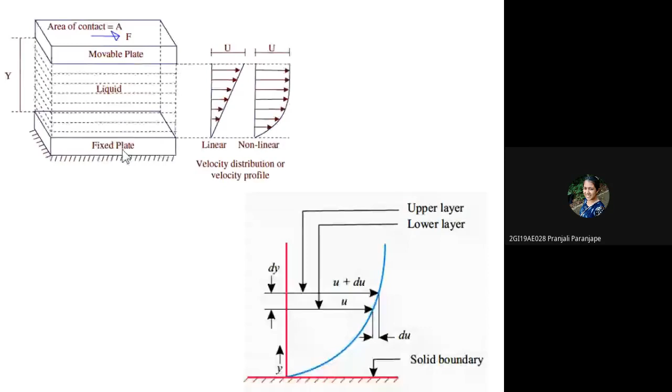Excuse me, sir, the voice is breaking a lot, so we are not getting the point. Okay, up to what point have you understood? Nothing, sir, from the start it's breaking a lot. Then you would have stopped me earlier. Sir, I thought it was my network issue. Then later it read that it's about everyone.

Okay, now the voice is clear. Yes, sir, yes, sir. Give the reply in the chat box. Shall I continue with the same thing now? Voice is clear now, okay. If any problem is there, just unmute in between and give the reply. Don't wait too long, just reply by unmuting the mic.

Today we are discussing viscosity. For viscosity, we have taken Newton's law of viscosity as an experiment, what Newton conducted. In that, he has taken a movable plate above the liquid volume considered for the experiment, and a fixed plate at the bottom.

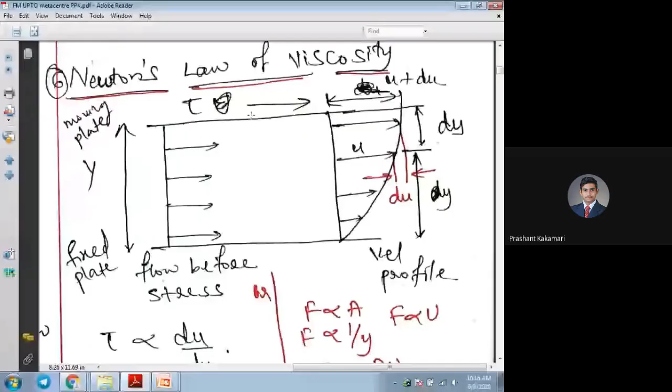We are taking this shear stress because of the top movable part. So this shear stress is related to contact area, and that can be written as proportional to velocity, and inversely proportional to distance y. As I told you, as you increase this y, the force required to move the plate will be less. As I decrease this distance y, resistance will be more. So shear stress or the force will be inversely proportional to the distance y, so that I have written du or u by y.

For a small layer of liquid, it will be du by dy. So whatever it is, the proportionality required means at what force I have to apply the shear stress, that will be decided by this mu, the coefficient of viscosity. So this coefficient of viscosity is nothing but the viscosity or the resistance required to overcome the liquid flow.

There, the force is directly proportional to area. Now here, area is what? Area of the surface which is in contact with liquid surface and the movable plate, so that area we are considering. And force is also proportional to velocity - after applying the force, if you see the velocity, that velocity is proportional to force. Meaning if you apply more force, velocity will be more, and if less force, velocity will be less - directly proportional.

But if you see the distance between the two plates, if I increase it, force required will be less. If I decrease the distance, force required will be more. So force is inversely proportional to distance y, as like shear stress. Now combining these force equations, I can write it as force is proportional to area in contact with liquid and movable plate, and u by y - meaning force is proportional to area and velocity, and inversely proportional to distance y, or distance between the plates.

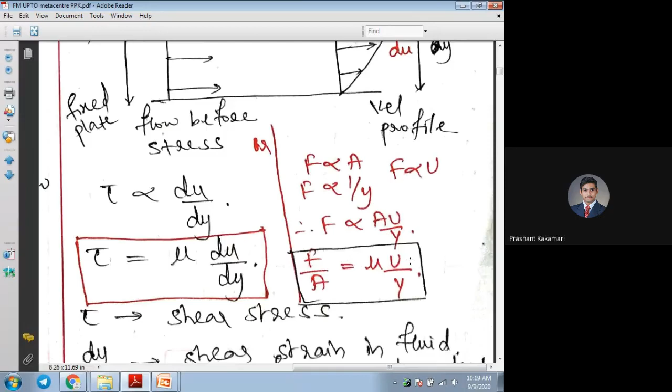Now if I take force by area, that is nothing but the pressure or stress, which is equal to mu. So mu is what again? It is just to make it constant or equal to sign - that is constant of proportionality. Mu we have taken, that will become u by y. So either you can find the viscosity by this relation or by this relation, depends on the given data in the problem. Data may be given to ask viscosity using shear stress, you can go by this. Or if the shear stress is not at all given, you can relate these two equations: mu into u by y, F by A equal to tau. So that tau will be nothing but shear stress. So either by using these two formulas, one can solve different numericals.

So this tau is nothing but the shear stress, denoted by tau. Then du by dy is nothing but the shear strain, we are calling it in the fluid, or it is also called velocity gradient. So velocity gradient is what? This change in velocity with respect to distance, or per unit distance - that we are calling velocity gradient.

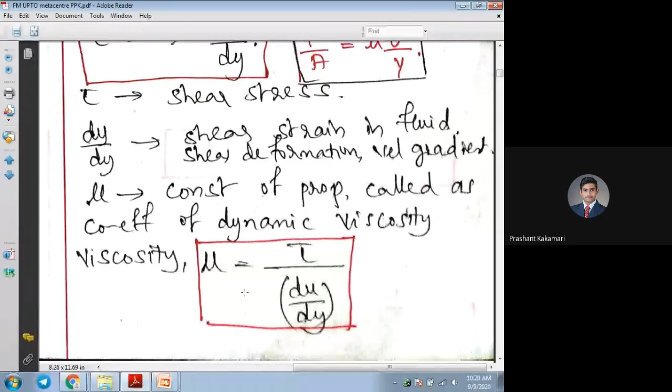Then mu is the constant of proportionality, also called coefficient of viscosity, or generally called dynamic viscosity many times. In problems, if they ask only for viscosity, you have to find the dynamic viscosity. So finally, if I write the equation for viscosity or dynamic viscosity, that will be mu equal to tau.

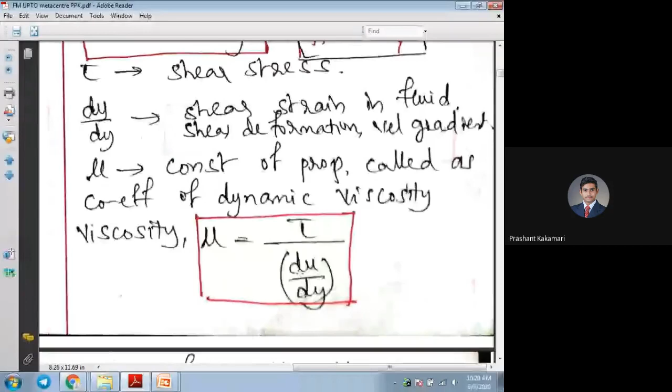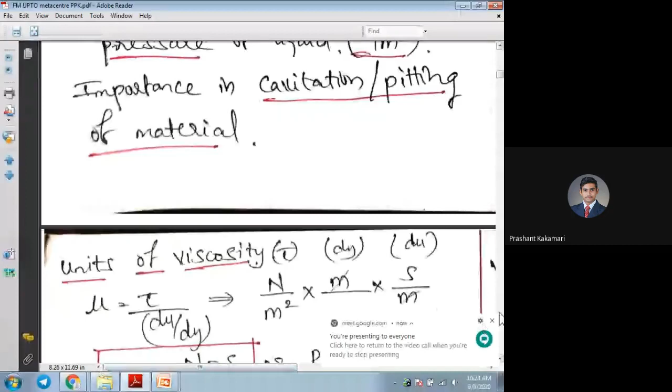So this viscosity is measured in various forms, and viscosity, if you see, is inversely proportional to temperature for the liquids. As you increase the temperature, the bonding between the molecules will reduce, or the volume of the liquid increases. So what will happen is the resistance or the viscosity value will decrease for the liquid, and it can easily flow. For this, one example you can take is coconut oil.

So as you see, at lower temperature it may be in semi-solid form. At given proper conditions, it may be in liquid form. And once I start increasing the temperature, the fluidity of the oil will increase.

But for the gases, if you consider, the viscosity is completely opposite, because the gases are moving not with the bonding between the molecules. It is the movement between the molecules, or the molecules are changing their paths and continuously excited in the gaseous form. Once you start increasing temperature or pressure for the gases, the molecular activity still increases, so viscosity increases, because all the molecules will come together at high pressures and less volume, and it will start to increase the viscosity at very high temperatures.

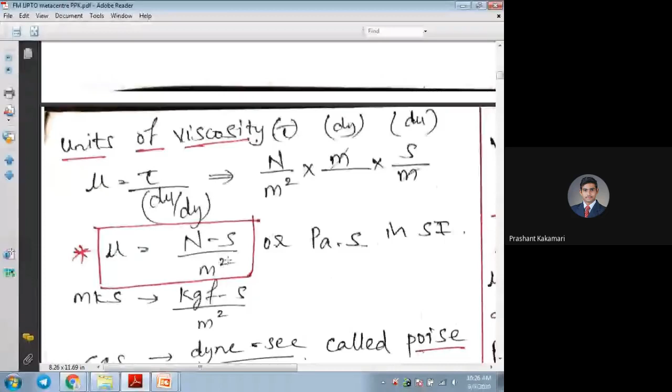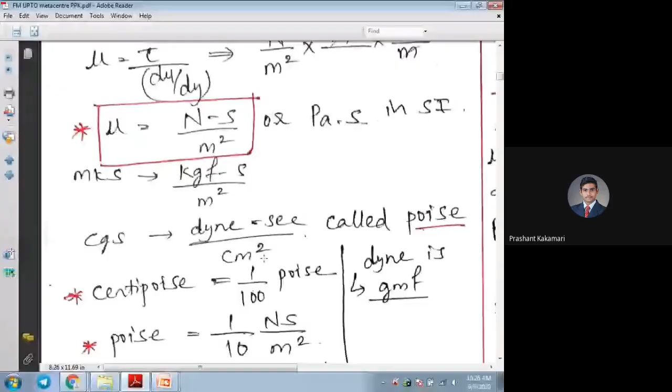So the unit of viscosity in SI unit is Newton second per meter square, or you can call Pascal second. Also in SI MKS unit, you can write it as kgf second per meter square, or in CGS units, dyne second per centimeter square. This is called poise. So one poise is nothing but 0.1 Newton second per meter square in SI unit.

If you write it in centipoise, it is nothing but 1 by 100 poise. So 1 by 100 into 0.1, if you multiply, that will become again Newton second per meter square. So this will be discussed in the problems again.

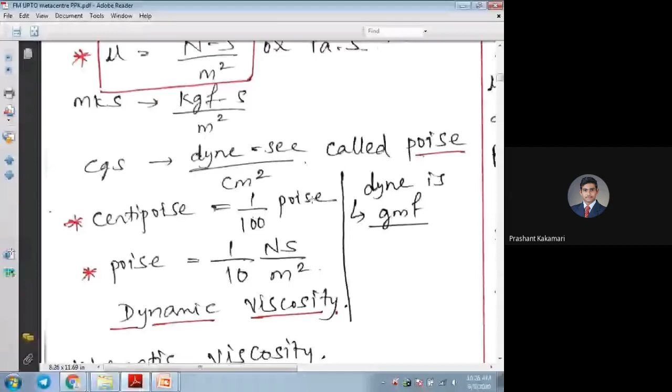Next point is kinematic viscosity. So kinematic viscosity is just a ratio of dynamic viscosity with respect to mass density rho. So mu by rho is what? Dynamic viscosity divided by density value.

Now if you check the kinematic viscosity units, it's denoted by nu here. If you check units, the dynamic viscosity has meter cube above, so we can cancel this meter square and meter square at the upper side. So we are left with Newton second meter per kg.

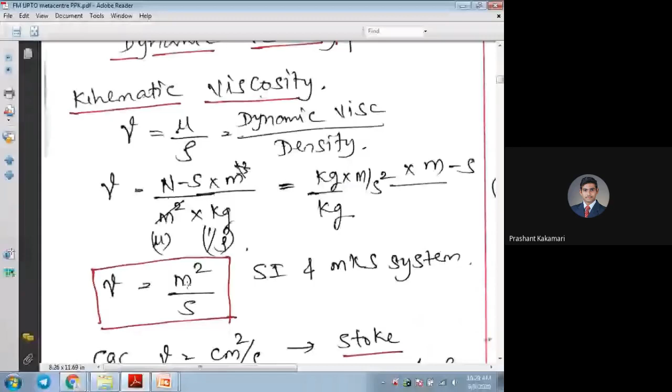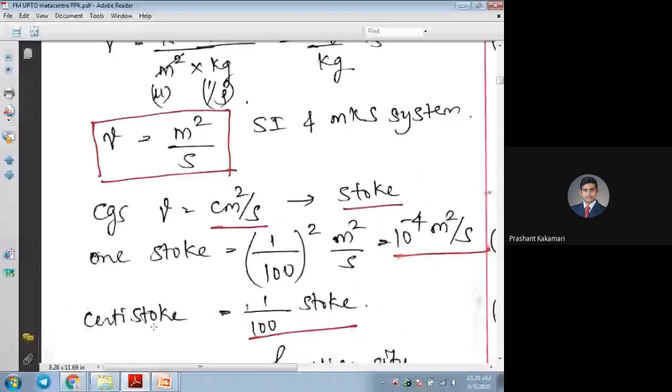It can be written in Stokes in CGS system, or it can be written in centi-Stokes also, 1/100 Stokes. And here, 1 Stoke is nothing but 1/100 square meter per second.

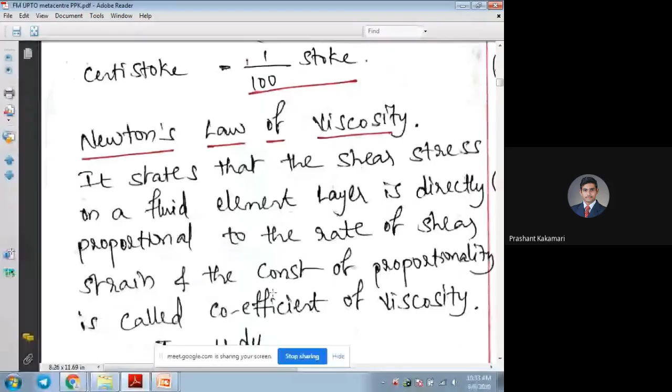So now, by understanding this equation of viscosity, the experiment Newton conducted and found out the equation, we know that tau equals mu into du by dy. So if you try to define it, it states that the shear stress in a fluid element or fluid layer is directly proportional to the rate of shear strain. The rate of shear strain is the velocity gradient, so you can write proportional to the velocity gradient also. Shear stress is proportional to the shear strain or velocity gradient, and the constant of proportionality is called the coefficient of viscosity.

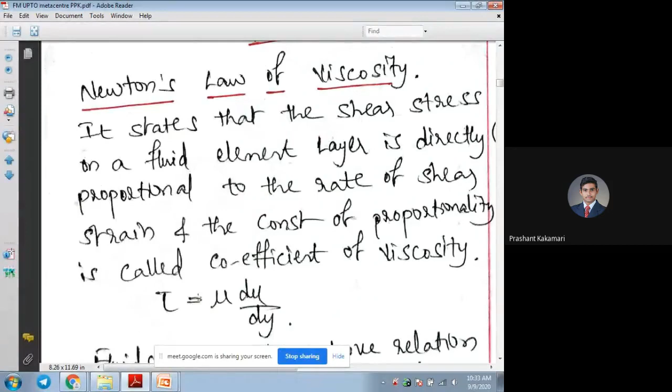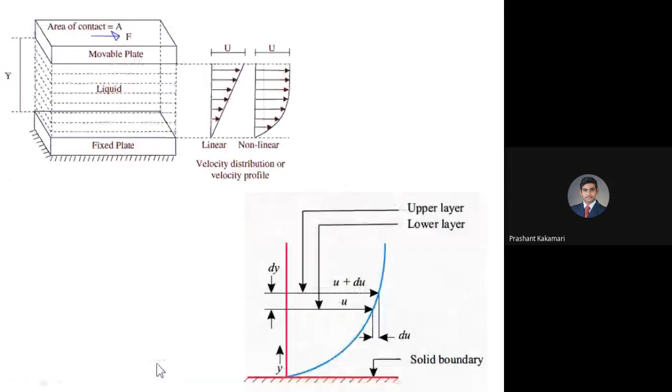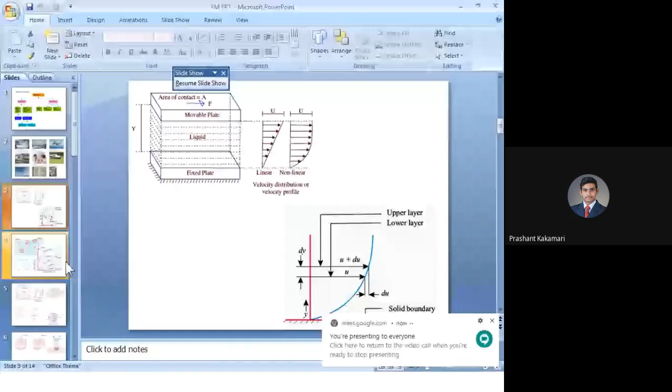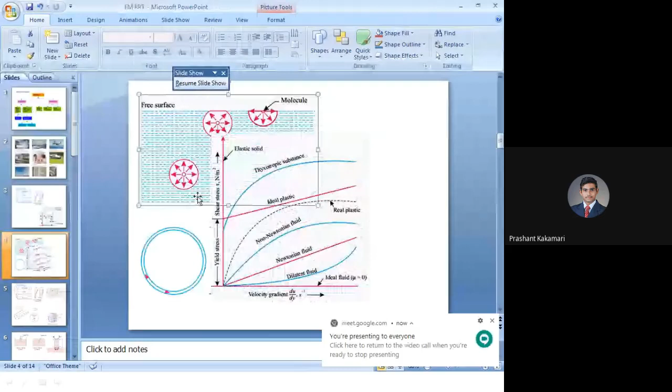Okay, yes, dynamic viscosity I'll once again explain to you. Just a minute, delete this. So if you see this graph upon the viscosity, on the y-axis they have taken shear stress or the stress values in Newton per meter square, the tau value they have shown. On the x-axis they have taken the shear strain, which is nothing but du by dy.

And if you see the different liquids, first I'll go for the Newtonian fluid because we have discussed dynamic viscosity just now, and we know how the Newtonian fluid should obey the law. If you see the Newtonian fluid, it is proportionally increasing as the velocity gradient increases, or as the shear stress or force increases. The property of the fluid behaves as per this line. So as the velocity gradient increases, the shear stress requirement also increases.

And we have different types of fluids here. Elastic solid is there - it is not at all changing with the velocity gradient, whatever stress you apply, until some limit. The plastic or semi-plastic materials, up to some stress, will not change their dimensions or move with respect to the forces. But after yield stress, it will start bending or changing its fluidity.

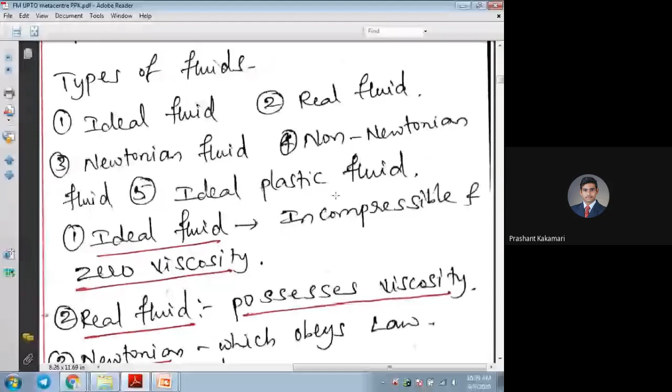So again, we'll come back to this and we'll observe. So we have ideal fluids, real fluids. Real fluids are nothing but the non-Newtonian fluids almost. Then we have Newtonian fluids, non-Newtonian fluids, ideal plastic fluids, thixotropic fluids, etc., or ideal fluids.

Coming to the ideal fluid, which has zero viscosity, these are incompressible in nature. Maximum times these are incompressible. We cannot change its dimensions by compressing or decreasing or increasing volumes. We cannot change the compressibility.

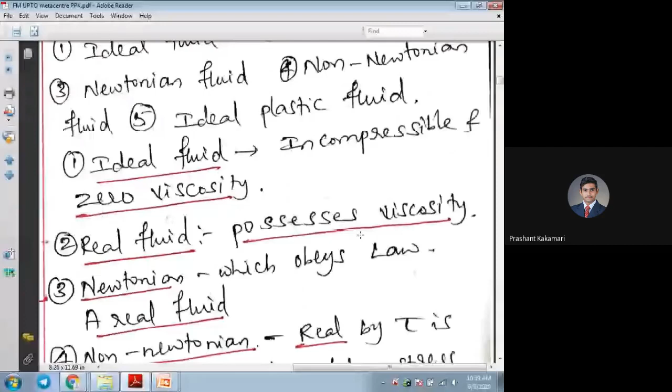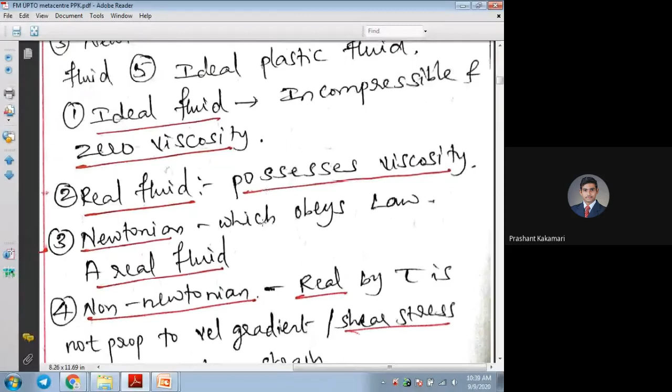Real fluids possess viscosity which is a little bit higher than Newtonian fluids. That is one thing, which is in curvilinear proportionality with respect to velocity gradient and shear stress. And Newtonian fluid, if you see, it just obeys the law of Newton. Whatever Newton explains the law for a given fluid, we call it a Newtonian fluid.

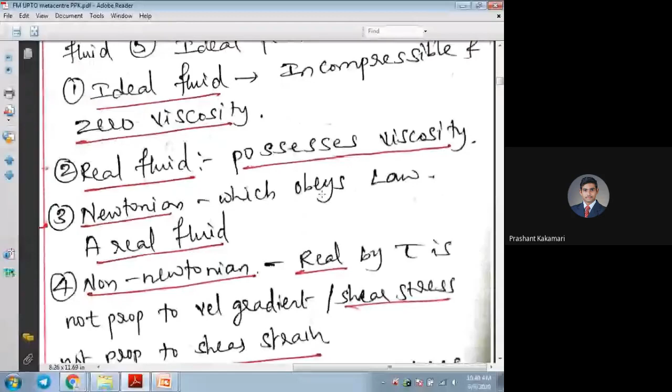Then non-Newtonian fluids, if you see, this is the real fluid, as I told. So real fluids and non-Newtonian fluids are almost the same. Here shear stress is not proportional to velocity gradient, it has a curvilinear path. So such liquids we call non-Newtonian fluids.

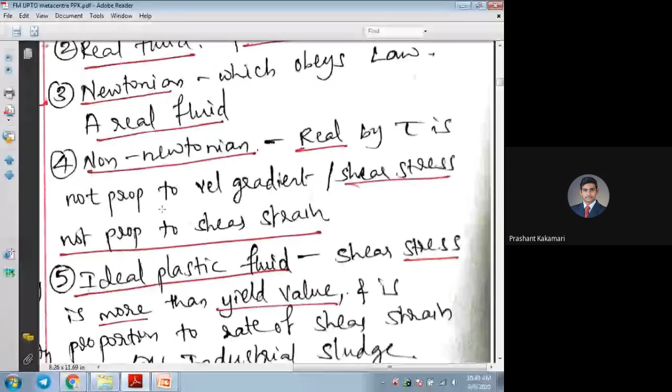Now comes the ideal plastic fluid. As I told you, to deform or start the flow in a given material, if it requires some minimum force to overcome the dimensions or to overcome the flow, that force we call yield force or yield stress. So once the yield stress is crossed, then it will start flowing. That is called an ideal plastic fluid.

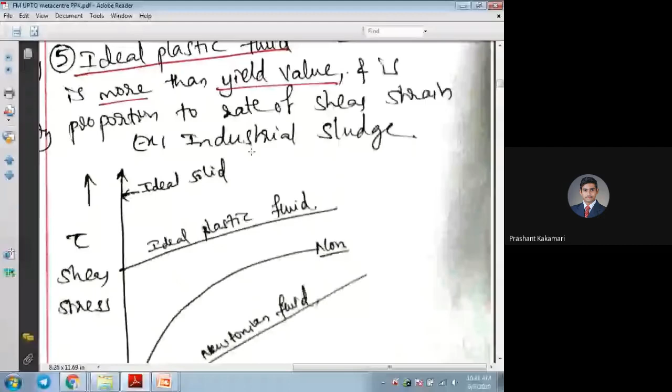So until that point, it has to overcome the resistance to change the velocities. Like very heavy viscosity fluids, or industrial sludge or waste, if you consider, you have to apply maximum pressure, and once it crosses some limit of the given stress, then only it will start flowing.

So this graph will indicate what types of liquids are possible. Change in dimensions with no flow is a solid, but even ideal solids also have some yield stress. So at a given point it may break, or it may start acting like a plastic body. So that also depends.

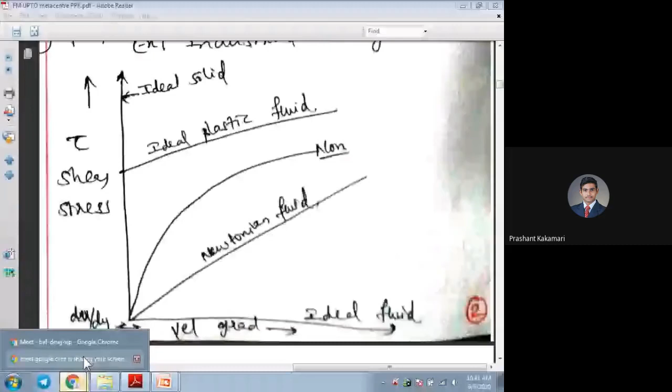So I hope the graph is clear to everyone. The shear stress, if it is proportional, it is a Newtonian fluid, otherwise it will be a different fluid.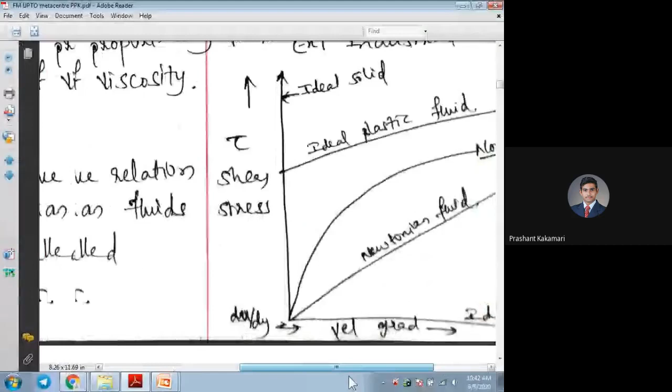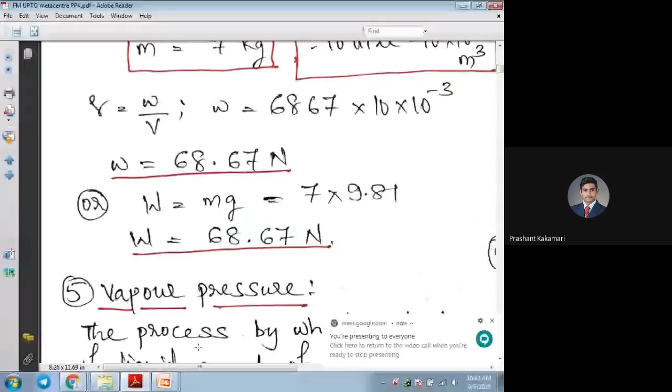Now we'll go back to dynamic viscosity once again. So shall I explain this once again? The change in distance, velocity gradient and shear stress, how it's going to behave with Newton's law? Is it required, okay?

So as per Newton, he has taken two plates. One is the fixed plate at the bottom, one is the moving plate at the top. The 3D sketch I showed earlier, you can imagine that.

Now any fluid, if you consider, generally it has some resistance to flow, because to start the flow between the liquids, we need to apply some force, and the force applied here at the top, if you see, is tangential in direction, so we call it shear stress. So force applied per unit...

The velocity gradient, or the change in velocity, is also proportional to force. As you apply high force, there will be a high flow rate or high movement of the liquids, and if you apply less force, it will be less. The velocity obtained for a layer of the liquid...

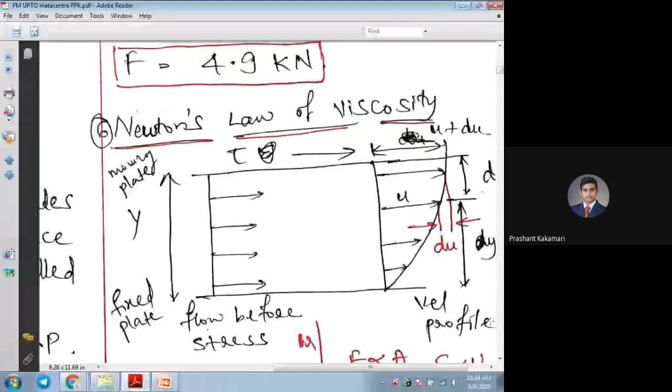Try to write it in the form of an equation. I can write it as one side, on the red color we can see written, that force is directly proportional to area. So how much area is in contact with the liquid, that much force we have to apply. One thing. One more thing is velocity.

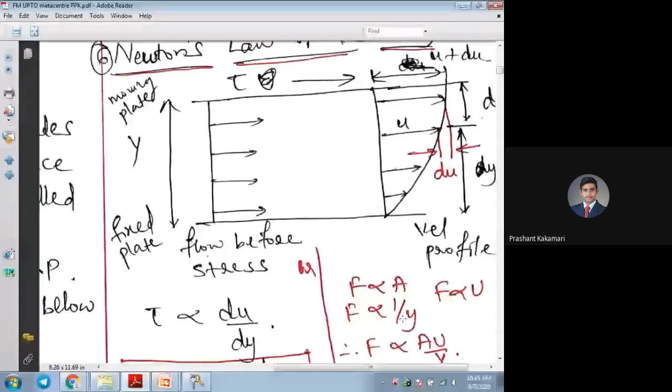And also distance, if you see, as the distance reduces, the force also increases because of the fixed plate or the non-moving layers at the bottom. So F is inversely proportional to Y. And if I combine all these proportionalities, I can write it as F equal to mu into A U by Y, or F by A equal to mu into U by Y. For the entire thing, the shear stress in the tangential direction, what is applied by the force per unit area, is also proportional to the velocity gradient.

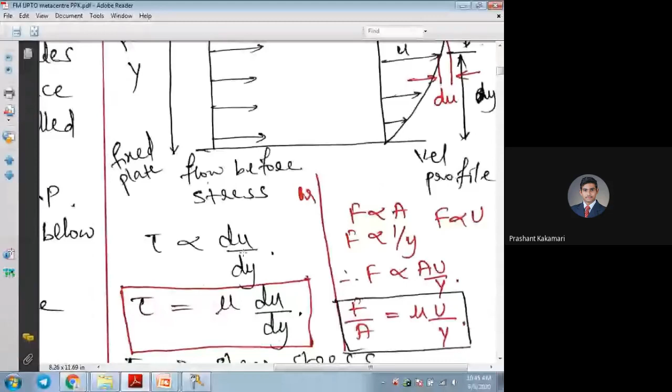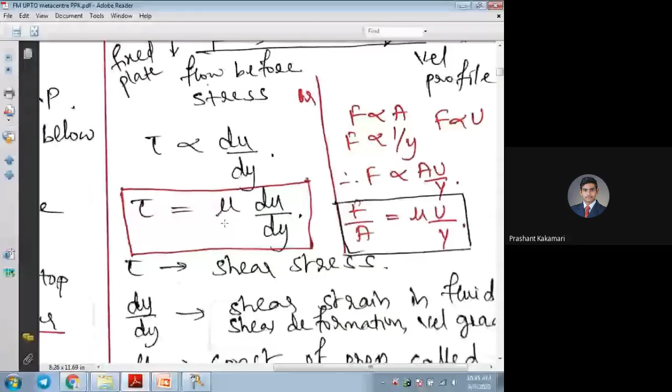To overcome this proportionality constant, we apply dynamic viscosity, or the coefficient of viscosity. By this equation, one can find out the viscosity value. As per this law, assume viscosity is not known to us. To find that viscosity, I can write mu equal to tau into dy by du, or mu equal to tau by du by dy. I hope this point is clear to everyone, how we are finding this dynamic viscosity or the coefficient of viscosity.

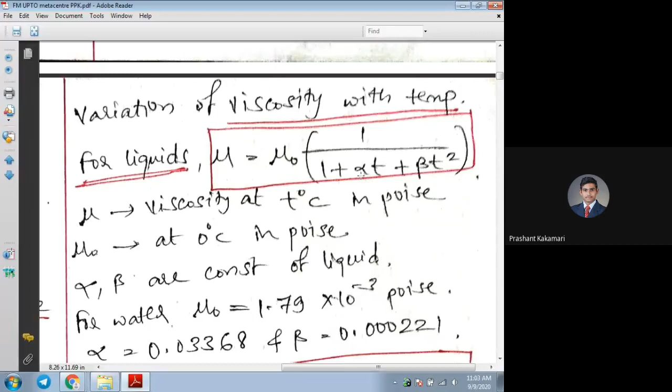Viscosity, if you see, is inversely proportional to temperature here. As per the generalized equation, mu naught into bracket 1 divided by 1 plus alpha t plus beta into t square. If you observe this equation and check the proportionality, temperature is inversely proportional, meaning as you increase the temperature, the viscosity value is going to reduce for the given fluid. Or if the viscosity value is very high, what will happen? The temperature value may be less. So that's how it is dependent on temperature, and for that I have taken this equation.

So this equation and the liquid viscosity-temperature relation, if you see, in liquid it is inversely proportional. That's why as temperature increases, molecular bonding reduces and viscosity of the liquid also reduces as you increase the temperature. But for gases, as you increase temperature, molecular activity in the gases increases and viscosity also increases. So the force required to move the gases or the layers of gases at very high temperatures is very high.

You can take examples in villages: if you see the gases coming from a small burner, they come out with very high velocity without any disturbance or problems. But if you see the same gases coming from a chimney, or a very high tower, or a very long pipe from thermal power plants or other big plants, those gases will look like they are moving very slowly. That is possible only because of very high temperatures. In the plant, if the temperatures are very high, the burning temperatures are very high. In such cases, if you exhaust those gases at very high levels of the atmosphere, what happens is the velocity of those gases will be less. That is due to the high viscosity of gases.

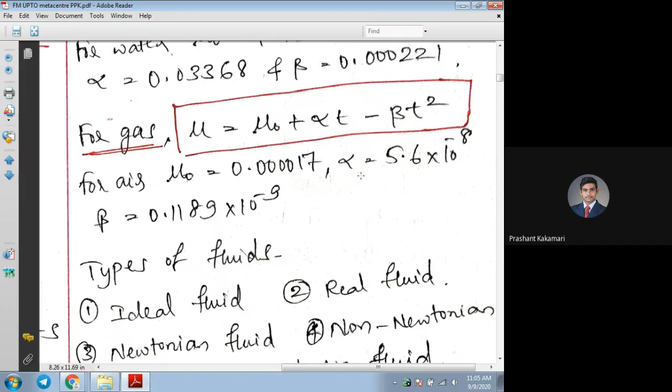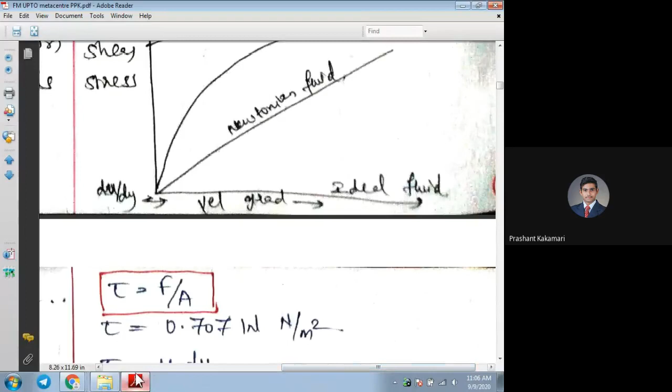So take down this problem. First problem with respect to viscosity.

The question asked is: viscosity of water is 0.01 poise. Find its kinematic viscosity and dynamic viscosity in SI units, if the specific gravity is 0.998. Specific gravity doesn't have any units. For specific gravity, they give a reference fluid like water, and one should find out the density of the other liquid or weight of the other liquid by the specific gravity relation.

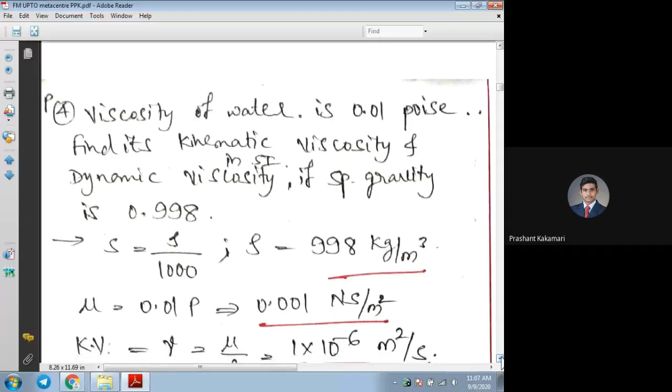So in this problem, you have to focus on the viscosity values. One is dynamic viscosity that we found out by derivation from Newton's law. Another equation is kinematic viscosity, found from the ratio of dynamic viscosity to the density or mass density.

Now, first, one can directly find the viscosity because dynamic viscosity of water is directly given as 0.01 poise. As I told you, if you multiply 0.01 by 0.1, it becomes the Newton second per meter square value. So 0.01 poise I can write as 0.001 Newton second per meter square.

So in this problem, there's no need to rewrite the shear stress or force relation with respect to viscosity or the relation with the velocity gradient. The viscosity of water is directly given here, so we write it in SI units as 0.001 Newton second per meter square.

Then I need to find kinematic viscosity, because as per the question, kinematic viscosity also needs to be found. So I'll write nu equal to the ratio of dynamic viscosity to density.

Which density do we have to take now? That is the question. If you take mass density, the unit will be meter square per second. If you take weight density, the units will be different. For meter square per second, as per the SI unit, I'll consider the mass density.

Now, to find mass density, we use the relation between specific gravity and mass density, because viscosity and density themselves have no direct relation, but we know the relation between specific gravity (or relative density) and density values. So I can write S equal to density of the given fluid to the standard fluid.

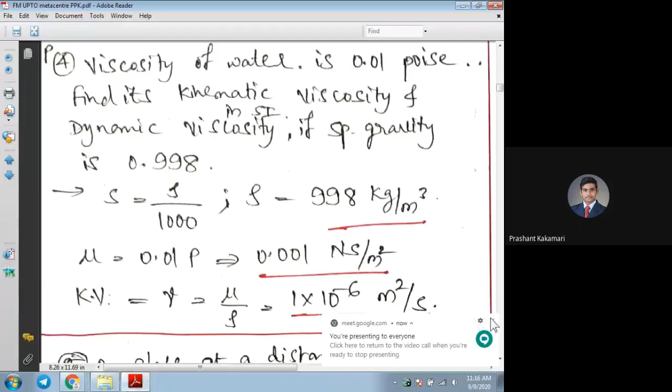Yes, so in the next problem I'll read the question here first, you'll understand what is given, what is asked. Now comes to Newton's law. A plate at a distance 0.0254 mm from a fixed plate moves at 0.61 meters per second and requires a force of 1.962 Newton per meter square. Area of the plate. Determine the viscosity or the dynamic viscosity between the plates.

So this is nothing but the experiment of Newton itself. What they are doing is they have taken two plates, one fixed plate at the bottom and a moving plate at the top, which is at a distance of 0.0254 mm. The top moving plate is moving at a velocity of 0.61 meter per second. To overcome the resistance of liquid, or the viscosity of that liquid, we have to apply a force of 1.962 Newton per meter square. This is nothing but the shear stress we have to apply, the tangential force applied on the liquid surface, per meter square area of the plate. Now you need to find out the dynamic viscosity of this liquid between the plates.

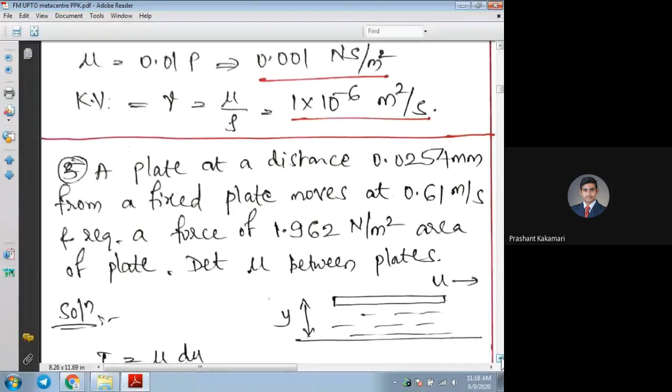So the sketch is made here. Y is 0.0254, U is 0.61. The equation can be written in either of two forms. First, shear stress is equal to viscosity into velocity gradient du by dy, or you can write tau equal to mu into u by y, assuming the complete liquid volume itself is a layer.

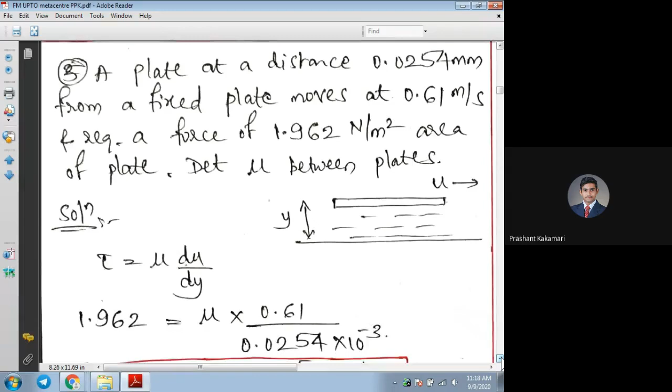So what we'll do is substitute the values in SI units. 1.962 is in Newton per meter square, so already in SI units. Mu we don't know, that is what we need to determine. The change in velocity u is 0.61 meter per second in SI unit. The distance given is 0.0254, this we need to convert into meters, because the shear stress is in Newton per meter square and velocity is in meter per second, but the distance is in mm. So I'll multiply by 10 raised to minus 3, it will be in meters.

Once you substitute all these values, one can get the mu value. So how much are you getting by this equation? Just check. Mu equal to 1.962 into 0.0254 into 10 raised to minus 3, whole divided by 0.61. So you'll get the dynamic viscosity or coefficient of viscosity. Newton has given this law to find the coefficient of viscosity.

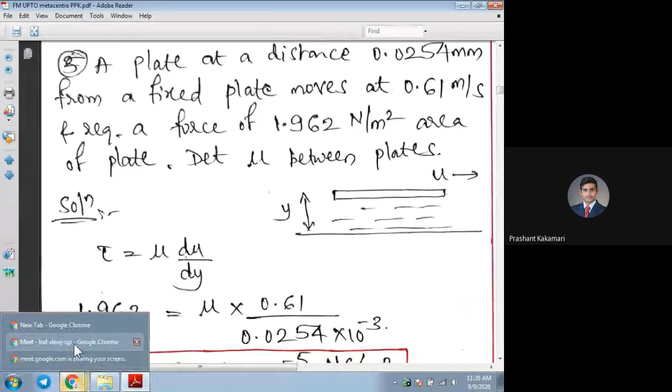Have you understood the problem? Just by one equation, applying Newton's law itself, because the statement itself is Newton's law of viscosity. Two moving plates, a fluid is kept in between, one is moving, one is fixed. Distance is given, area of the plate is given - sorry, area is not given here, they have given it in terms of shear stress. If they had given it in the form of force and area, then we would have taken F by A.

We'll take the next problem.

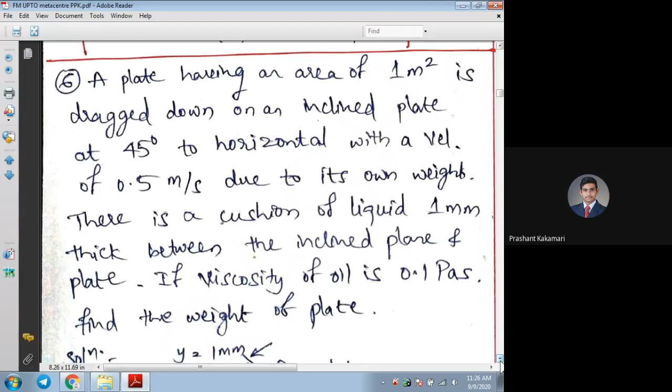So coming to the analysis, I can draw the sketch like this with the horizontal plane, 45-degree fixed plate, I will consider 45 degree. Plate is also moving at 45 degrees, and in between there is oil of thickness 1 mm. Velocity is 0.5 meter per second. Viscosity of the oil is also given as 0.1 Pascal second or 0.1 Newton second per meter square.

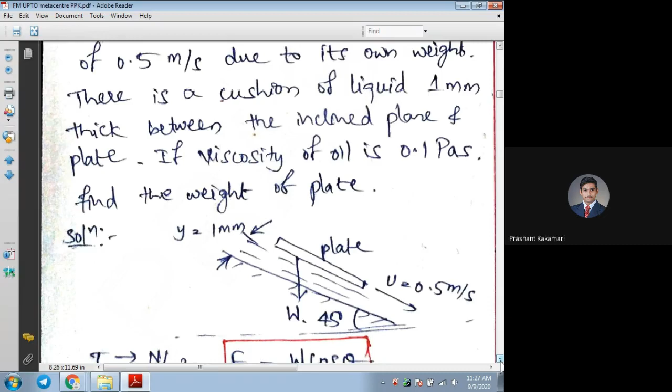Now, if you consider the weight of the plate, as they are asking, you find only the weight of the plate. Don't focus on all these other parameters given. So if I want to find out the force by the plate or the weight of the plate, consider that it is acting downside, so that is shown there.

So one can find out the force by using this relation because here we know the angle, and we know... weight is given or not? Weight of the plate is nowhere given. So what we can do here, cos 45 is known, but what about the W?

W is not known, still we need to find out. So keeping that W as unknown, what they are doing is finding cos 45 only, because of the adjacent and hypotenuse lines which are known, assuming that angle is given, so we don't need the length of the lines. So F will be 0.707 into W.

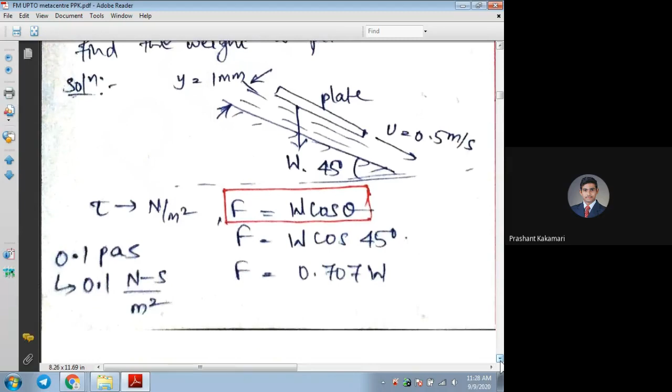And conversion of that Pascal is given at the side, that already we have discussed. And next step, to find the weight of this, as I told you, shear stress I can write it as F by A. So assume I'm writing F by A equal to mu into U by Y.

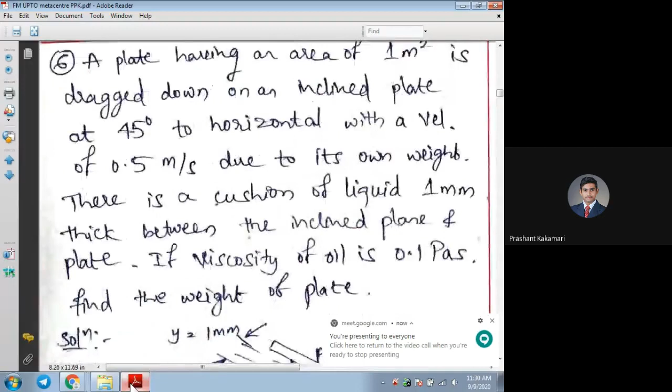What we have done, we have taken two plates. One is fixed, one is moving. Both plates are at an angle of 45 degrees. This is a special case, angle 45 degrees. And it's moving downside because weight always acts downside due to gravitational force.

In this problem, using this velocity, viscosity, distance between the plates, angle, or area of the plate, one should find out what is the weight of the plate. That's all. Now for that, 45 degrees given, it is with respect to adjacent and hypotenuse lines.

So once one can write the force as the force applied by the plate in the inclined direction, I can write W cos theta. The direction in the inclined side shown is nothing but the force applied by this weight of the plate.

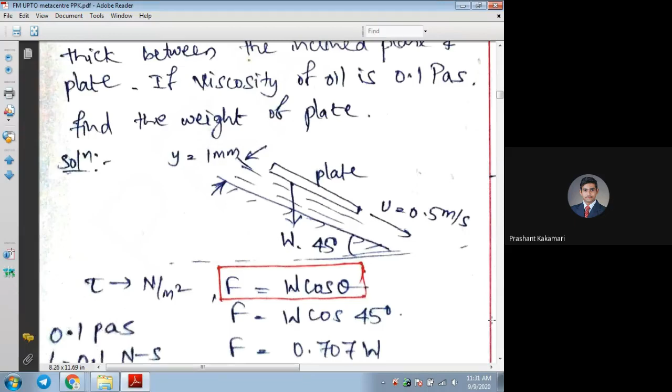So W is not known, but I can write cos 45 value. Once this is known, I will take the Newton's law of viscosity, that is F by A equal to mu into du by dy.

In this formula, if I substitute all these values where W is unknown, and by just transferring the terms from left to right side, I can find out the W, which is around 70.72 newtons in SI unit. So that weight of the plate is 70.72 newtons.

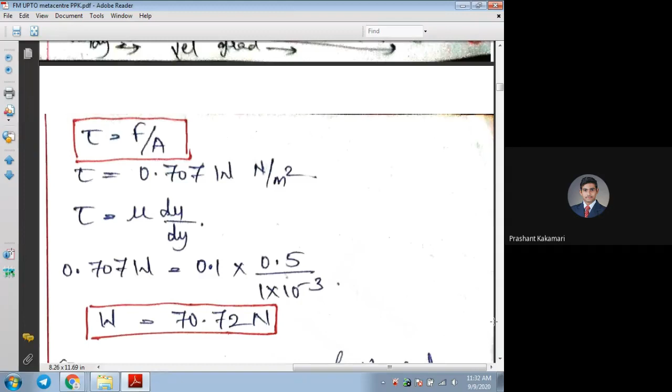So we'll see the next problem. In this problem...

Dynamic viscosity, same viscosity again, dynamic viscosity of oil. Please everyone also follow the problem, understand it, or if you want, you can write down and check the answers by the equations, how you are finding it, whether the answers are correct or not, or you just copy down so that you can understand the problem, how to solve.

So in this problem, they have given dynamic viscosity of oil used for lubrication purpose between a shaft and a sleeve is 6P. So 6P, if it is given as a viscosity, whether it is 6 Pascal or 6 poise or what, can you reply me?

What do I have to assume? Poise? Yes, very good. So if only P is given, or with respect to viscosity it is told, you have to assume it as 6 poise. The shaft diameter is 0.4 meters.

We are lucky that dimensions are given in meters directly, no need to convert. Diameter of the shaft is 0.4 meters and it rotates at 190 rpm. Until now we discussed speed in linear movement, meter per second. But in this problem, the shaft cannot move in a linear direction, it has to rotate between the sleeves of the hollow cylinder. A solid shaft is rotating inside the hollow cylinder with a lubricating oil, at 190 rpm.

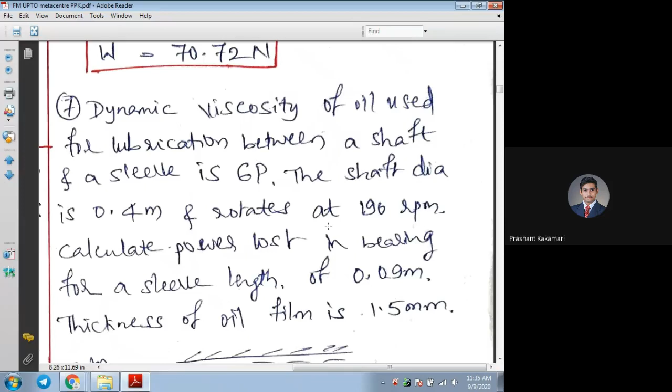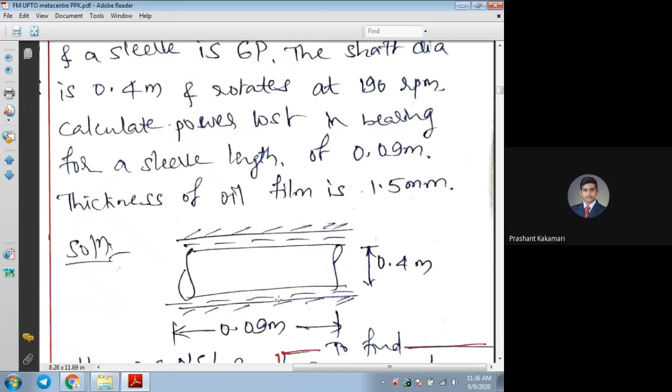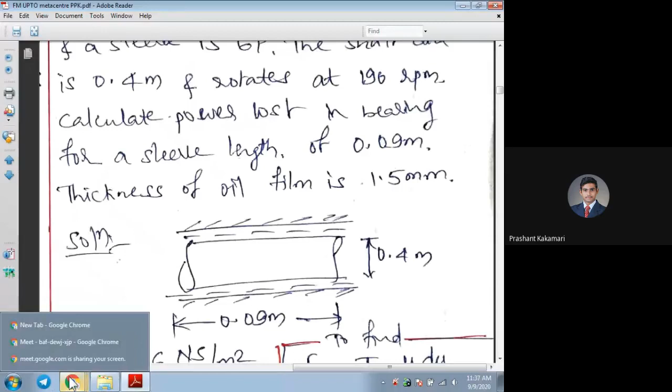So here RPM is given. When they ask for power loss, we need to use different formulas itself. So can anyone recall any relation which relates RPM and power loss? Just try, can you reply? The relation which relates speed in RPM and the power loss P.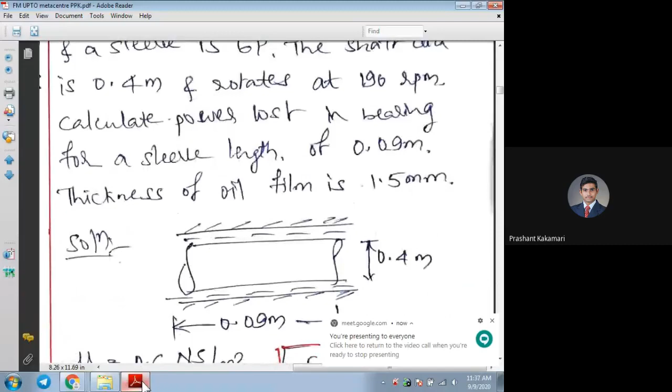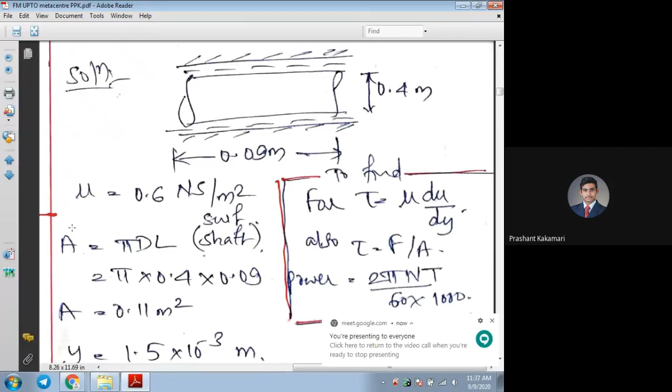Okay, what I can do here: as you know, 6 poise is given, I'll multiply by 0.1 to get it in Newton second per meter square. Then area of contact - length is given, and area, if you see, is the hollow cylinder area, the surface area of the inside cylinder, that is pi d L. Pi d is the perimeter of the cylinder; throughout the length, that becomes the contact area, the cylinder in contact with the oil for that given distance, pi d L. So area is clear for this hollow cylindrical area, or surface cylinder area, it is pi d L only. Pi d is the perimeter, ring is pi d, L is the cylinder, total cylinder surface. So it's inside, I'm taking diameter as the inside diameter, 0.4 meters, and L is 0.09 meters. So one can find the contact area of the oil and sleeve, that comes around 0.11 meters squared.

As I told you, the relation between power and speed - since they are asking power loss and speed is given, and we don't know torque - what you can write is 2 pi n T by 60. For all rotational shaft equations, wherever power transmission is possible, the power lost or power transmitted by the shaft, you can take this equation, 2 pi n T by 60. Here n is in rotations per minute, which we need to convert to seconds in SI unit, so we are dividing speed by 60.

And this is the torque. Torque is force applied for a given radius of the shaft. The torque available on the shaft is nothing but the force available in the tangential direction from the center of the shaft, F into R - I'll show it later. That is the torque. And why are we dividing by 1000 here? It is not to convert any values here, but we are dividing by 1000. Any answer?

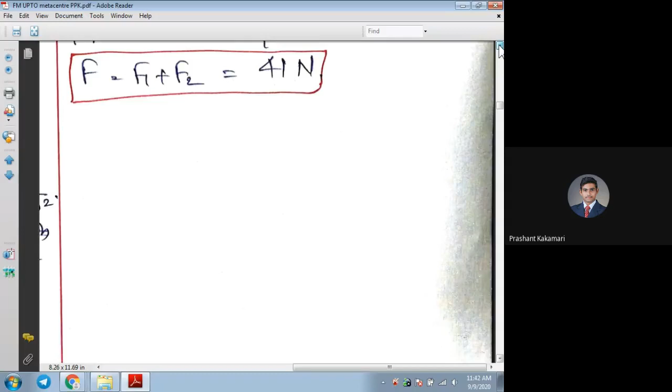So now I have got the U value. U value is around, how much did you get there? U value is 3.979, I'll take 3.979 meter per second. Now we got the velocity value.

Viscosity is also given. Y is also given in mm, we can convert it in meters. By this equation, tau is not known, so I can write directly tau by substituting all these values. Viscosity is 0.6 Newton second per meter square, found out here, at the top.

U is the velocity in linear, 3.979 meter per second. Distance y is 1.5 into 10 raised to minus 3 meters. Once you substitute all these values, I can find out the shear stress applied, or what is there in the liquid surface which is in contact with the shaft. Because the shaft is rotating, it is trying to overcome the resistance of that liquid, or trying to overcome the rings of that liquid cylinders, or the liquid rotating in cylindrical layers.

So there is a resistance between all the cylindrical layers between the shaft and the sleeve, and that resistance it is overcoming. So the answer is around 1.59 or 1.6 into 10 raised to 3 Newton per meter square. Can you tell me, what can I write in other form? I can convert Newton into kg, that is also there, but we are preferring Newtons in SI units. So I can also write 1.6 kilonewton per meter square. Correct? 10 raised to 3 is kilo. Yes.

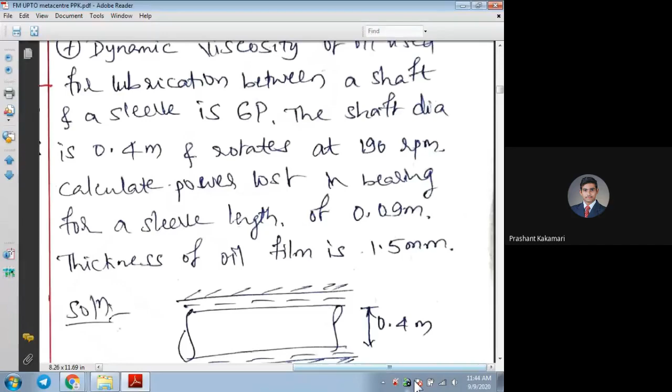Then what is the question? We have to find out the power lost in bearings of the sleeve length. Only if you find the power lost, it is over. But to find the power lost, we need all these equations. This is the power available in the shaft, not power lost. The earlier power we took is the power available from the shaft that we got. But here also torque is not known, only RPM is known.

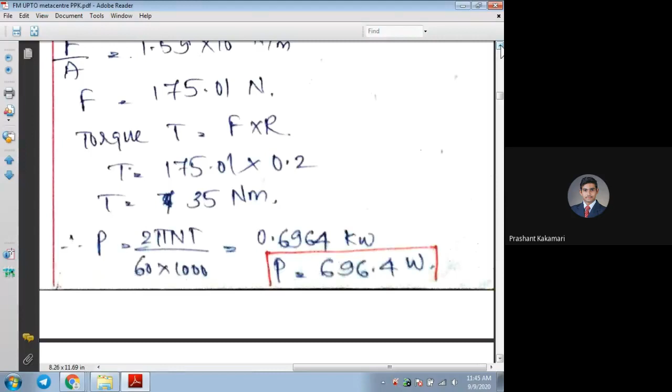Now we'll go for the torque. How much is the power? So now if I go for the torque, I can write the torque as F into R. You assume that one circle is there, the cross section of the shaft, and I know the radius of the shaft and the tangential force applied to rotate the shaft. That is the minimum force required to overcome the resistance of the lubricant oil.

So I can write torque required to overcome as force into R, because we need torque for the minimum power required to rotate the shaft. In that case I can write force. Force is how much? They haven't given it directly, but force per unit area I can write as tau itself. In the earlier problem also we have seen shear stress is nothing but force per unit area for liquids. So I have taken this as 1.59 into 10 raised to 3 Newton per meter square.

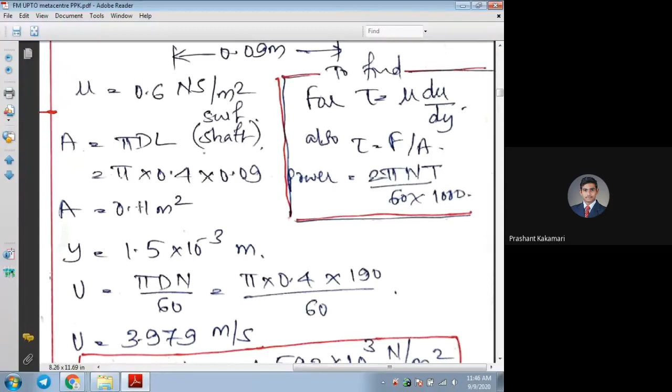But area of the sleeve is also known. What is the area of the sleeve? We have found out pi d l, where it is pi d l here. The area is 0.11 meter square. So if you multiply these two values, one can write the force like this: force is equal to 1.6 kilonewton per meter square into 0.11 meter square.

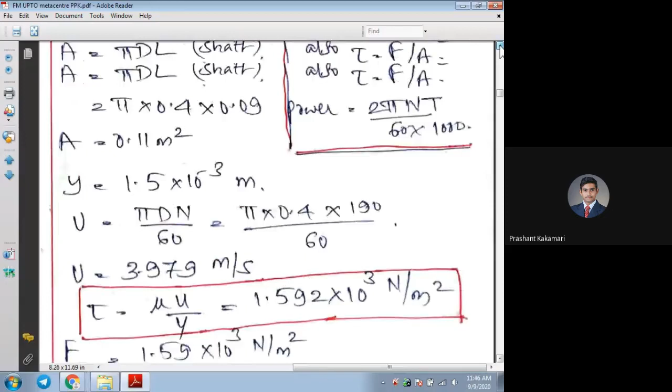That will give us 175 newtons. So radius of the shaft is known, because they have given the diameter of the shaft. Diameter of the shaft is 0.4, so radius of the shaft is 0.2. So here we have taken 0.2, so 0.2 into 175.01, the torque required is 35 Newton meters. Force is in Newton, radius is in meters.

Now we'll find out what is the power, or the minimum power required to rotate the shaft and to overcome the resistance of that lubricant between the sleeve and the shaft. That much power is lost actually, between the lubricant oil and the cylinder or shaft which is rotating. Now, if I rotate the shaft above this power, the shaft can supply power from one end to the other end with this loss, because I am supplying more power on the other side of the shaft from the motor or some machine. Then I can transfer it to some other machine. But minimum power should be how much? This much. So that minimum power, how much is lost or required just to rotate, or to overcome the resistance of the liquid itself, that we are finding here.

So now we know torque, RPM, RPS is also known. So you use all these terms in 2 pi n T by 60 into 1000. If you take all these terms, I get the power lost, or the minimum power required to rotate the shaft, as 0.6964 kilowatt. Or as I told you, you can write it in watts also: it will be 696.4 watts. This is the minimum power required.

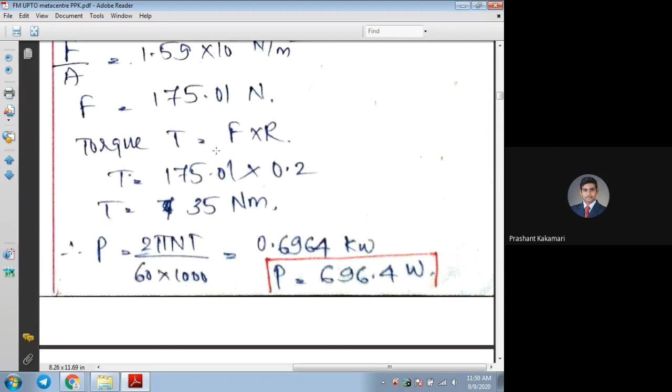I hope these points are convincing to you. Let's repeat once again. So what we have found out is the total power is 0.6964 kilowatt, as per the relations of viscosity, shear stress, torque, and rotation speed, diameters, everything. This is related with respect to power required to rotate the shaft, with respect to overcoming the resistance of the liquid. This is the shaft rotating here, in between sleeves or in between the liquid layer.

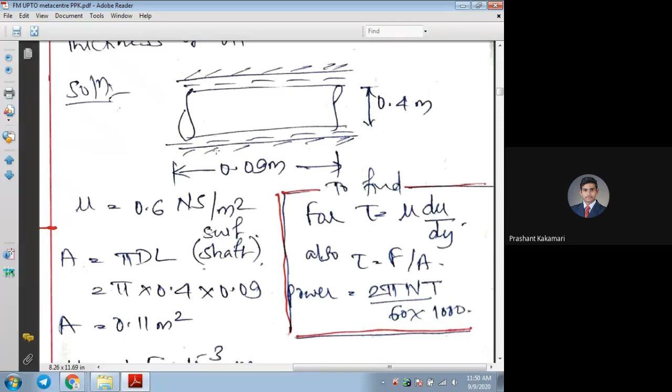So to rotate this shaft, we need some force, or some extra power is lost. That minimum power, whatever is lost to rotate that shaft, is 0.7, almost we take 0.7 kilowatt nearly. Meaning, if at any time I apply power less than this 0.7, I cannot rotate the shaft, because resistance of the liquid, or the viscosity of the liquid itself, is more than the power applied. I cannot rotate. But whenever you apply more power than 0.7, say for example 1 kilowatt if I apply, 0.7 kilowatt is lost in rotating the shaft or overcoming the resistance of the liquid itself. Then the remaining 0.3 kilowatt is supplied from one machine to another machine. Now it is clear?